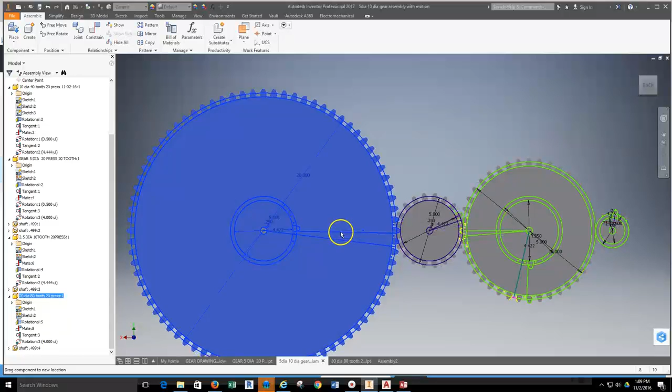In order to get your gears brought into an assembly so that you could then grab a hold of a gear and spin it, or if you wanted to use a rotational drive constraint and have the gears spin on their own, we're going to walk you through that process right now. So to do that, we're going to have to open up a brand new assembly.

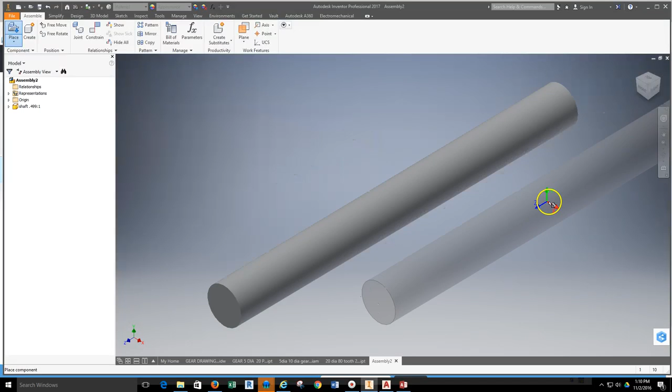First I'm going to grab the shaft, and I need at least 2 of these, so I'll drop 2 of those in my assembly. Then I'll go back and grab the gear I just made, that 10 diameter 40 tooth gear, and drop that in the assembly. The last thing I'll get is the first gear I made, the 5 diameter 20 tooth gear, and we'll drop this in the assembly as well.

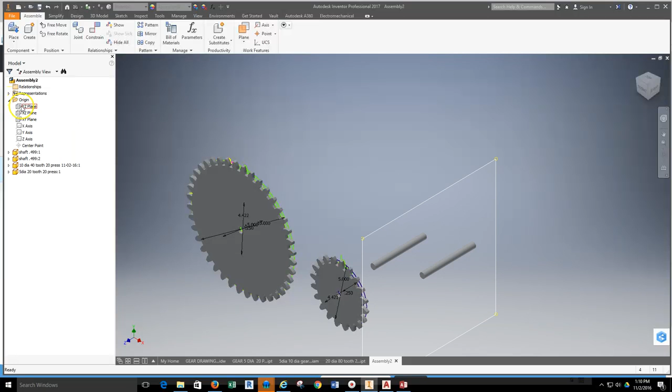Now, in order to get these things to constrain and line up properly, I'm going to turn on my origin planes so I can use these planes for alignment. I'm going to have these planes turned on.

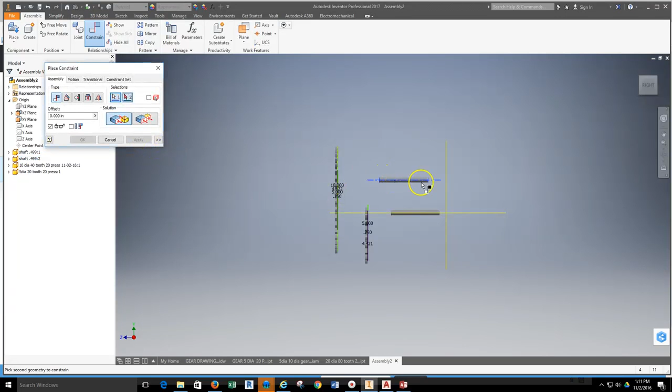First thing I need to do is get my shafts set up so that they're on the same plane. Right now, if I turn, I can see this plane and they're floating up here, this one's floating down here. I'm going to want to align them to that. So I'll grab my constraint tool, make sure it's on mate. I can grab my first shaft, align it to the plane, hit apply. I'll grab the second shaft and align that to the plane, then hit apply.

Now I can turn this. They are now set to this plane. They can still move, so we'll get them set up in position.

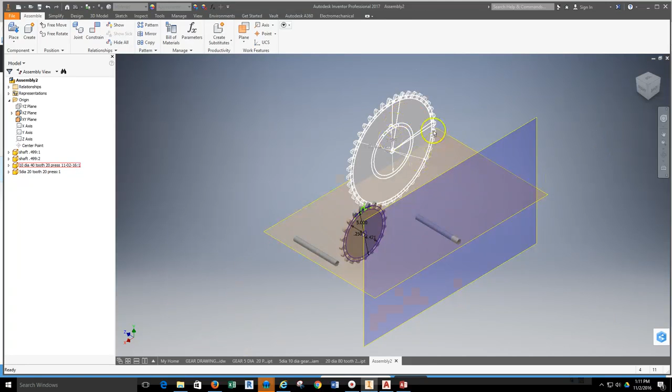Next thing I want to do is get these gears to apply to the shafts so I can see the sketch geometry, which I'll end up utilizing later. To do so, I'm going to grab my joint constraint tool, and the joint constraint I want is the rotational joint constraint. So I go ahead and select the rotational joint constraint.

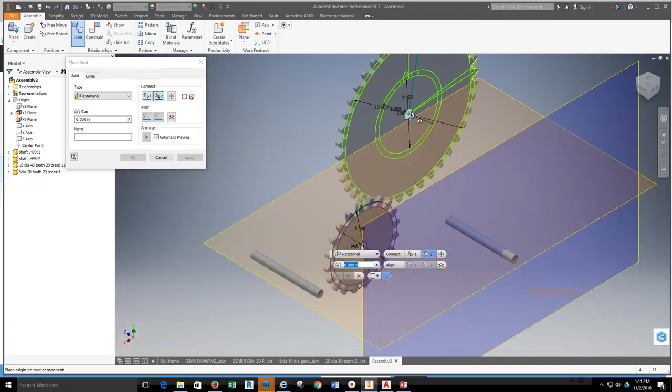I'm going to slide in on the gear to ensure that what I select is the front center hole of the gear, and then select the front face of the shaft as well so those two mate properly. Now that they've been set up, hit apply. I'm going to do the exact same thing again with my smaller gear and the shaft, and make sure those two get put together. Hit apply.

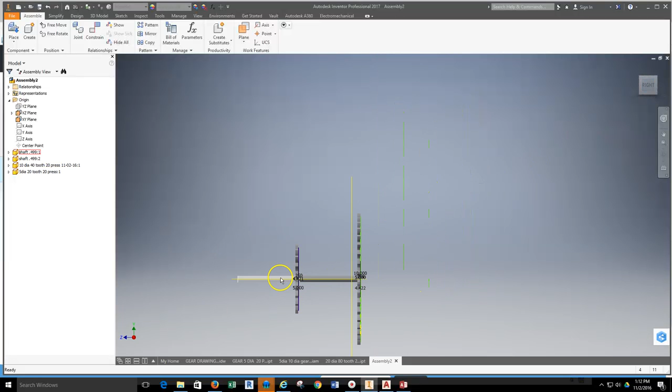Now the next thing I want to do is turn this, and I can now see that my gear and my shaft have been put together and they are on plane, but there's nothing keeping the face fixed. So these faces will need to get fixed. I'm going to use this plane to do so.

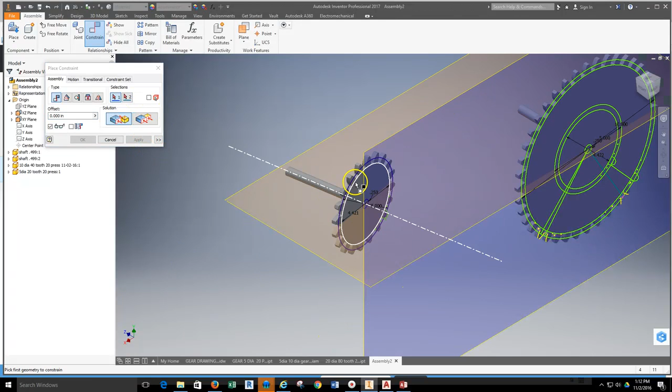So I'll grab my constraint tool, my mate constraint, and constrain this face to this particular plane. Now they've been set, hit apply. I'll do the same thing again to this gear, grabbing the face of the gear and then the plane.

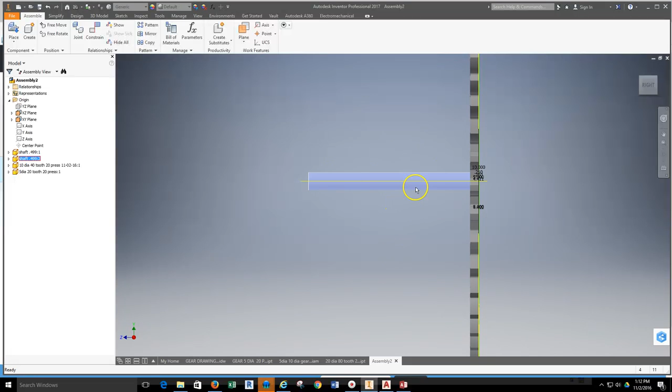Now those are fixed in plane, and I can slide them back and forth this way, but I can't pull it away. If I turn and look at this in my view cube directly from my right side, I can't pull it away, I can't even pull it up or down because it's fixed to the shaft, to the original plane. Now what I did do is I moved them really far away from each other, so I'm going to bring those back together here before I continue.

So now what I'm going to do is I need to get the spacing correct between the two gears, and that's going to be taken care of by my tangent constraint.

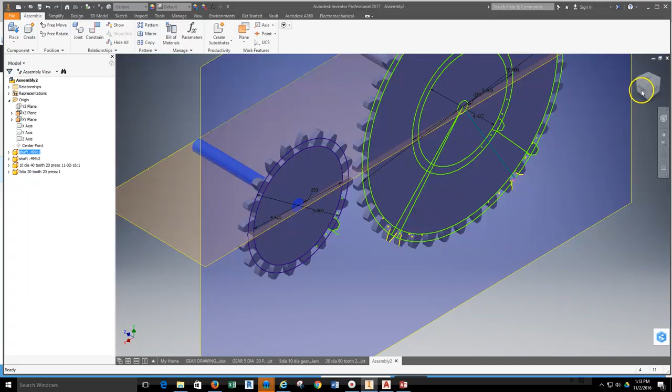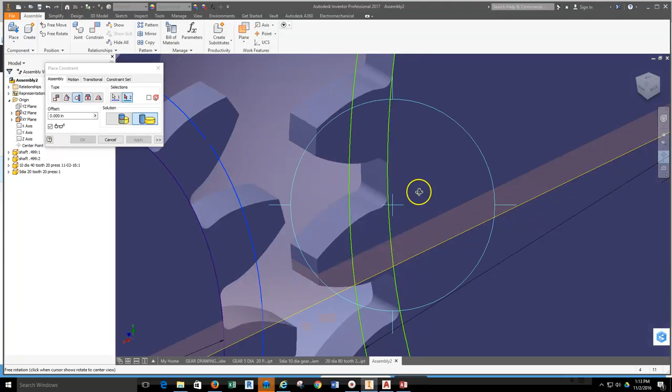Okay, it's still aligned, so I'll go ahead and put these together using my tangent constraint. I'll grab my constraint tool, and what I want is the tangent constraint off of my selector bar. I grab the tangent constraint, then I'm going to grab my pitch diameter of the first gear and then the pitch diameter of the second gear here. I'll turn this so you can see me grabbing that pitch diameter a little bit better, and then they come together, and you can see how they are actually mating together right here. Go ahead and hit apply to that.

Now they're still not set in any orientation, and you can still see how they kind of move a little wildly.

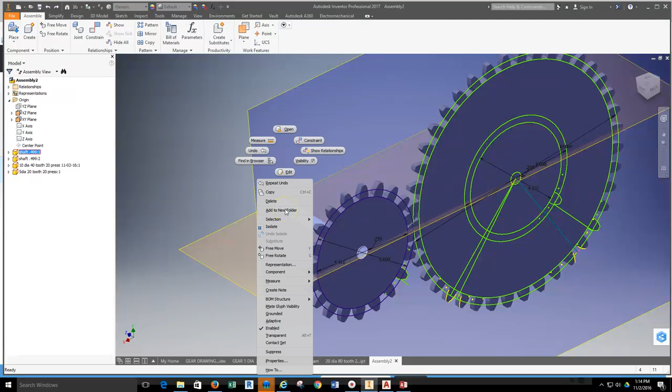The reason why they kind of move wildly is because my shafts have not been grounded. I do not need to move the gears back and forth, the only thing I'll have to do is rotate them. So I'm going to select a shaft, right click, and ground the shaft, and do that to both of my gears. I'll select the other shaft, right click, and ground that shaft as well. Now that they've been grounded, the only movement I should get out of these gears is a spinning motion.

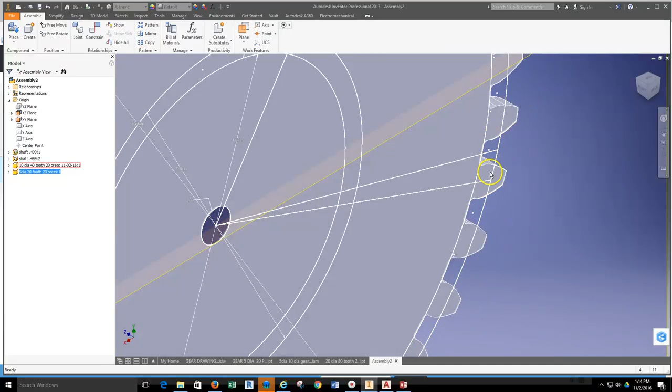Now I need to get these teeth to align to each other, and that's where I'll utilize the geometry on this gear that I've already put on, to find the center of the gear space and the center of the gear tooth. If you haven't done that yet and need to, this gear doesn't have it, so I'll go ahead and do it here.

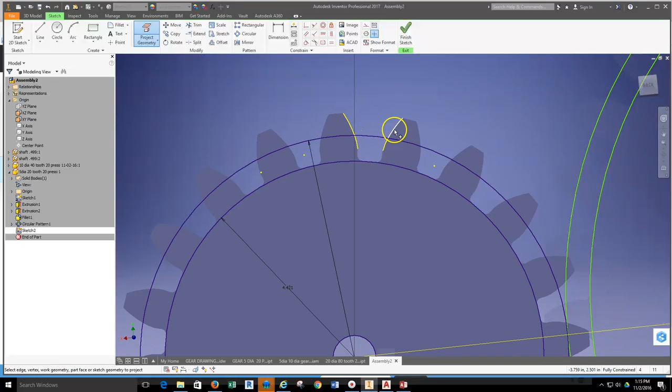I'm going to double click on the gear itself. It opens up that gear within the assembly, and then I'll put a new sketch on that face. Next, I'll project the geometry of a gear tooth and a gear space, and draw a line from one side of the pitch diameter to the other side. If we get a wild click like this, we just need to do it again and make sure these link up properly.

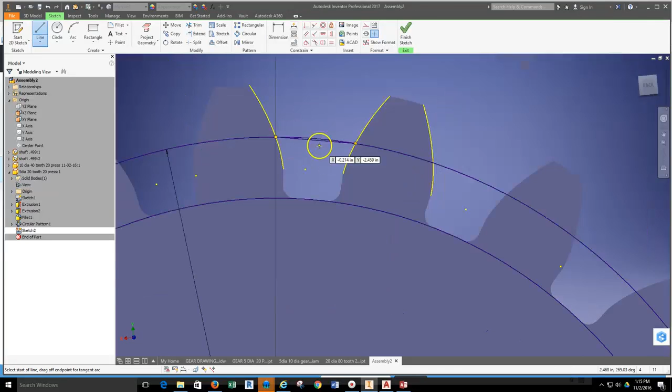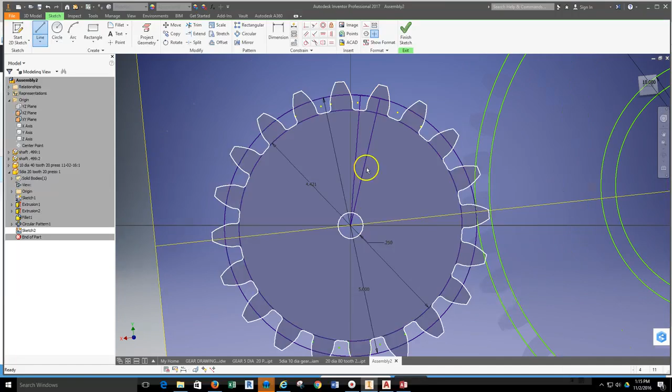Then I'll keep going. I'm going to go across the tooth as well because I may need to align in some other way here. I'll get the center of that gear tooth down to the center of my gear, and then do it again from the center of the gear space down to the center of my gear as well. That way I can finish the sketch, return to the assembly, and now position the gear tooth or the gear space directly to the plane.

So I'll grab my constraint tool next. With the mate constraint, I'll select the line of the tooth, and then I'll select the plane, and it then snaps to position.

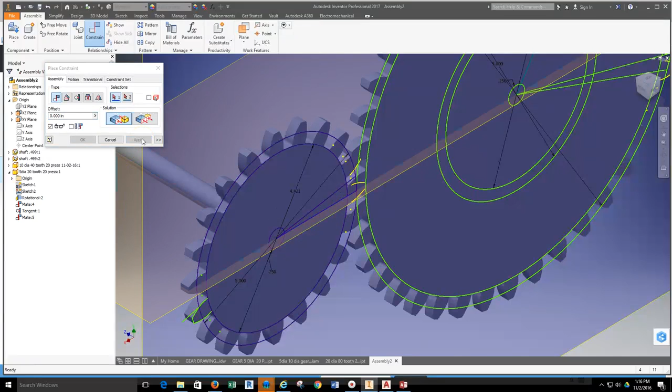I'm going to remember this constraint because I'll have to either suppress it or delete it. So next I'm going to grab the solution mate again, and select the gear space and align that to the plane. By doing so, that has now aligned my teeth properly, and I can hit apply.

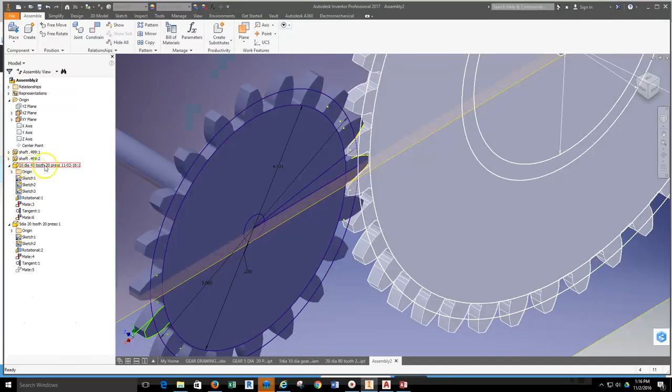I can hit cancel, and then go into the mate constraint I just placed, and delete or suppress it. I'm going to suppress that. Then I'll go up to the 10 diameter gear and suppress that mate as well. What that does is turn off the particular gear mating, but I want it there in case I ever need to get them aligned again.

So I'm going to turn off my visibility for my planes, as they're not necessary at this point in time. And now I'm going to get my rotation set up.

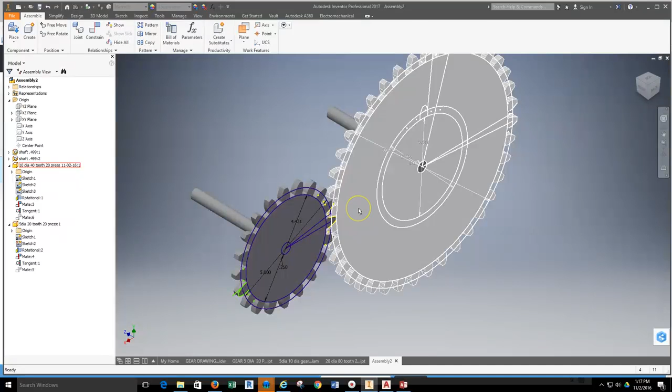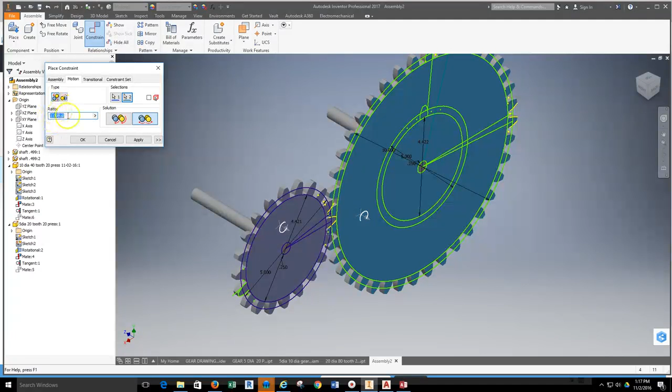I'm going to grab my constraint tool, go to motion, and select the rotational motion, and then select reverse motion, because the way this gear spins in this direction, the other gear will spin in the opposite direction. By doing so, I now need to set up the ratio between the two, so I place that information in here. I'll just say 2, then hit apply, and then cancel.

So what should happen now is as I spin a gear, you can see the other gear spinning. Now, it looks to me that because I selected this gear first and this gear second, the ratio is backwards. So I'm going to go in and edit that ratio. I'll right click, hit edit, and change this ratio. Instead of making it 2, I'll make it 0.5. Now as I turn my gears, you can see that they are meshing properly. It has to do with what I selected first and second.

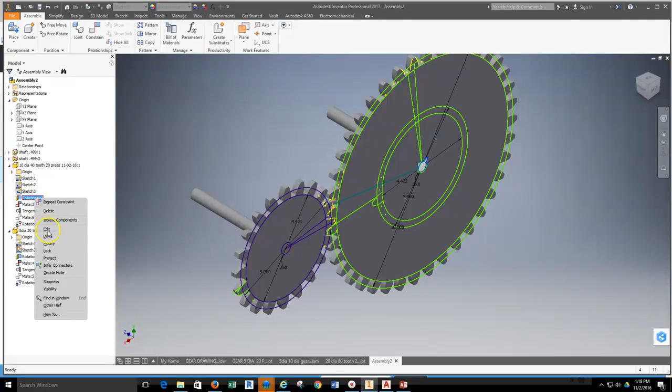If I go and select the rotational joint constraint and select drive, I can now tell it to start at the 0 angle and end at 360, and I should get a full rotation on my gears. With that set up, we can now finish the video.